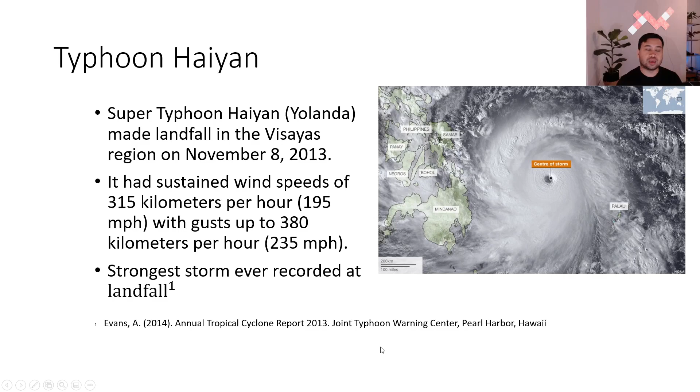Gusts reached about 380 kilometers per hour, and it was the strongest storm recorded at landfall at that time.

In terms of damage, about 6,300 people died, 28,000 people were injured, and about 16 million people were affected. In terms of infrastructure damage, around 1.1 million homes were destroyed or damaged.

The economic impact was about 12.9 billion US dollars. These are pictures from the city of Tacloban, which reported about 90% infrastructure destruction.

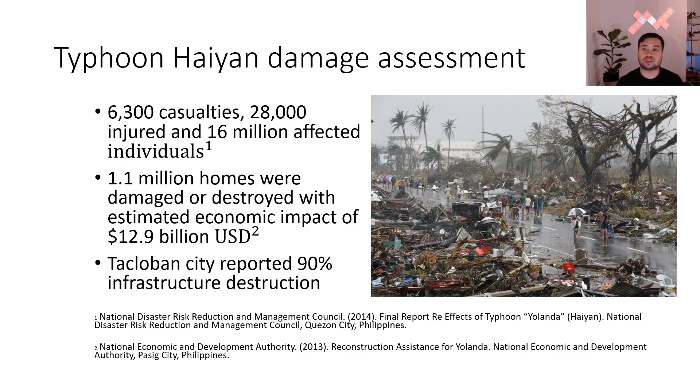This is the path of the typhoon, coming from the Pacific Ocean. It passed through the Leyte Gulf and made several landfalls in Tacloban, Palo, Tanauan, Tolosa, and Guiuan.

It made its first landfall in Guiuan and went westward towards Leyte province. Tacloban is the most populous city in that province, which is why it had a lot of casualties and damage.

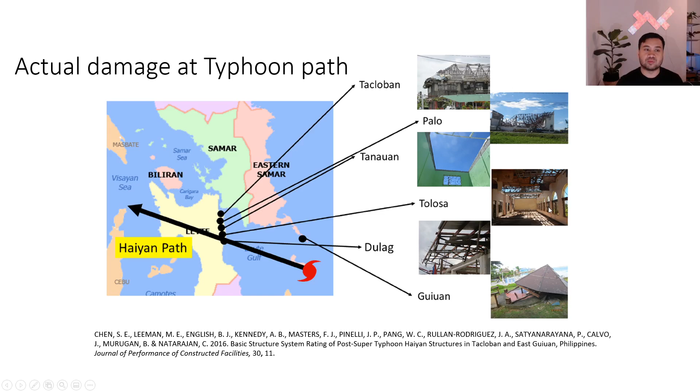As you can see, the damage incurred along the path of the typhoon was mostly to the roofs, which were gone. Here's a sample of that.

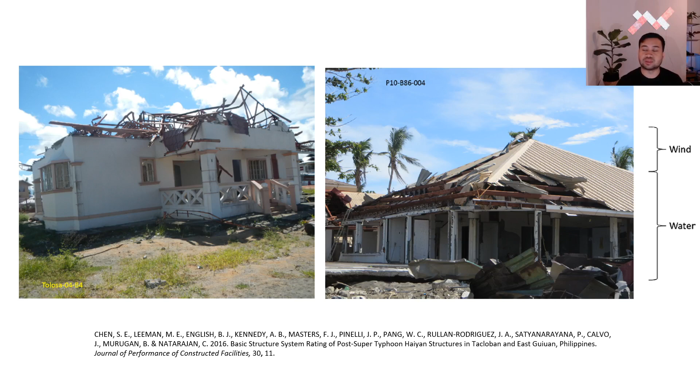Because of the strength of the winds, the damage occurred mostly in the roofs. Most of the people who died in the storm drowned because of the storm surge, but most of the infrastructure damage was caused by strong winds.

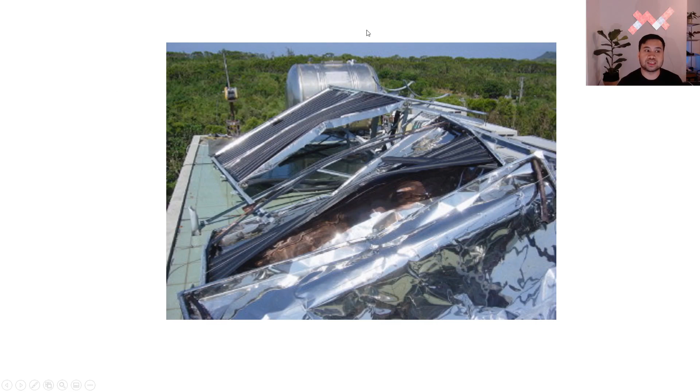At the same time, if you have renewable energy systems mounted on the roof, they will most likely be destroyed as well, as in this case. So in the Philippines, solar PV panels are installed on roofs.

Mostly they are installed by the upper middle income class or upper classes, and can be installed in different configurations depending on how much energy they need.

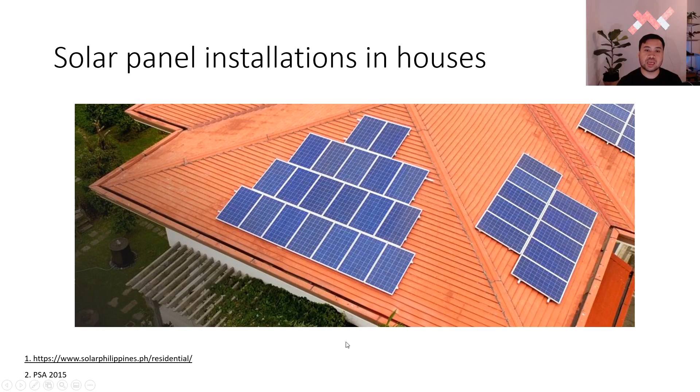We have 23 million households in the Philippines, and only around 218,000 households have solar panels installed as their source of energy.

So the point is, since a lot of storms pass through the Philippines, these renewable energy systems, such as solar PV panels, need to be protected from these typhoons, and they have to be structurally resilient as well.

The problem is that the building codes are not really clear about where to put the panels in order for them to be protected from natural elements.

So what we can do is estimate the damage the panels will have, or position them properly using a combined framework of structural resilience and energy assessment.

In the structural resilience analysis, we combine computational fluid dynamics and finite element analysis, which results in fluid structure interaction.

This can predict how much damage will occur in the panels when a certain storm passes through the roof.

At the same time, we wanted to check whether the panels installed on those roofs may be able to power the household and its occupants using BES, or building energy simulation. The data coming from the FSI will be performed independently, and then we can perform the BES also independently, and combine those results in order for us to say what is the proper panel configuration and roofing.

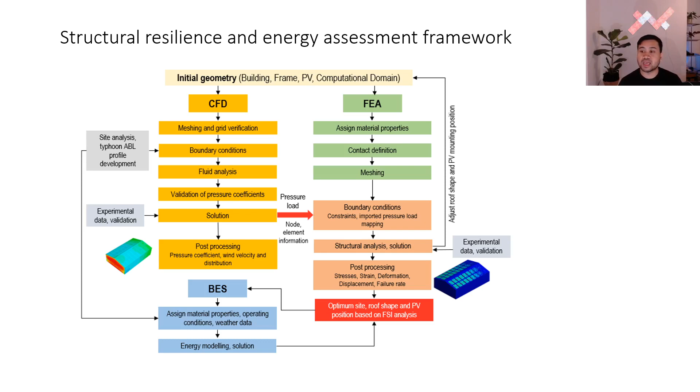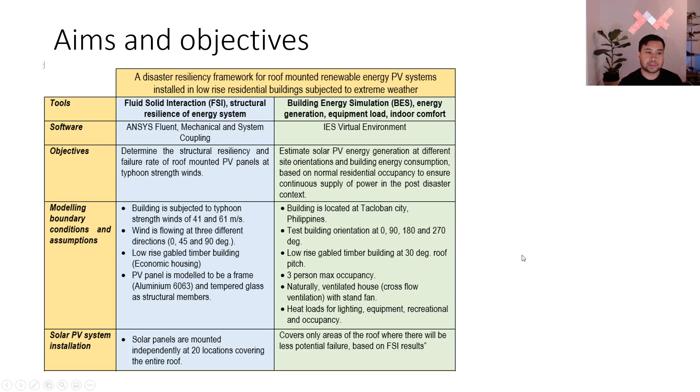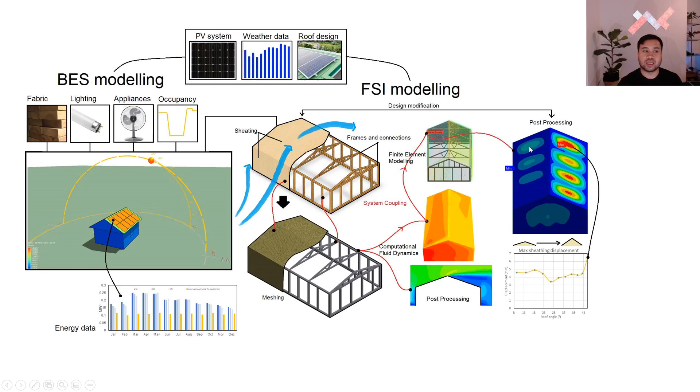So this is a graphical abstract we're going to do. We're going to do FSI modeling. Of course, we have one base building which has the PV system, the weather data, and roof design, and this will be shared across BES and FSI modeling. So this will be our building, which is just a small building.

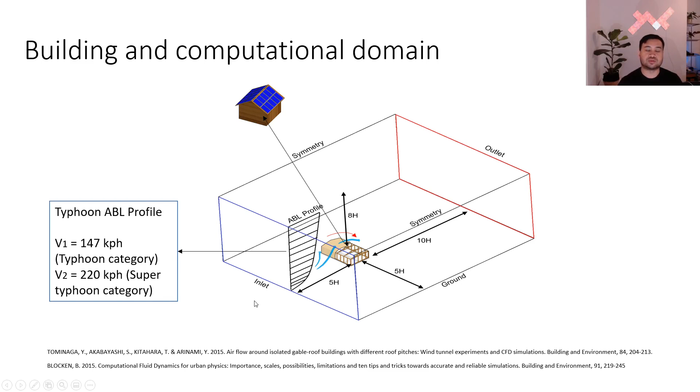So we're going to subject it to 2 wind speeds, 41 and 61 meters per second. 41 meters per second is 147 kilometers per hour, and the higher wind speed, 61 meters per second, is 220 kilometers per hour, which is a super typhoon category. We're also testing 3 different wind directions, wind flowing from this side, at 45 and 90 degrees.

The panels will be mounted on the roof, made from SunPower E19 solar panels. The building size is 25 square meters. The reason why we chose this is that in rural communities, the houses are very small, and for low income economic housing, typically the floor area is just 20 to 25 square meters. We wanted to target those low income communities, because if there's going to be rebuilding, we want to build houses that are resilient to future disasters.

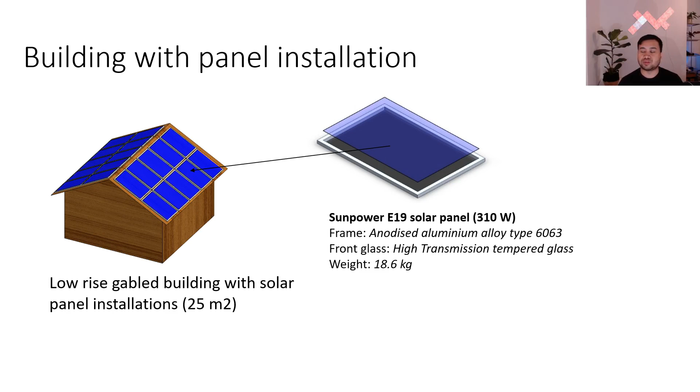So this is our base model at 30 degrees. We're going to test also a 26.5 roof pitch and a higher roof pitch of 37 degrees. We wanted to see what will be the effect of increasing the roof pitch on the performance of the solar panel in terms of generation, and at the same time in terms of structural resiliency.

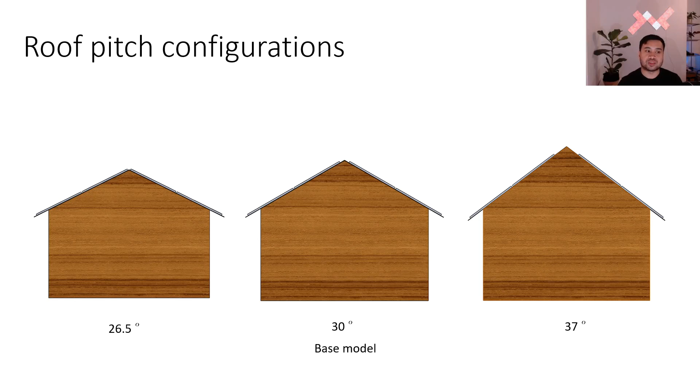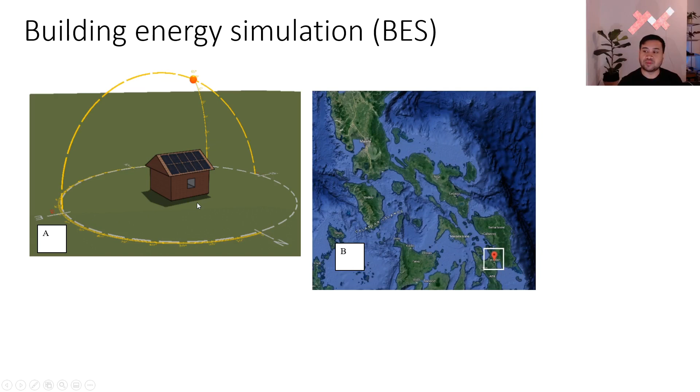In the BES setup, we're going to put this in the city of Tacloban. All of the weather data and solar energy data will be based on the city of Tacloban. This will be the building, and then we can change the orientation of the building to determine the proper site orientation: 0, 90, 180, and 270 degrees.

For internal loading, we're going to put 3 persons inside, 2 windows on opposite sides, 1 stand fan for space cooling, 2 CFL lamps, and 1 television for recreational use.

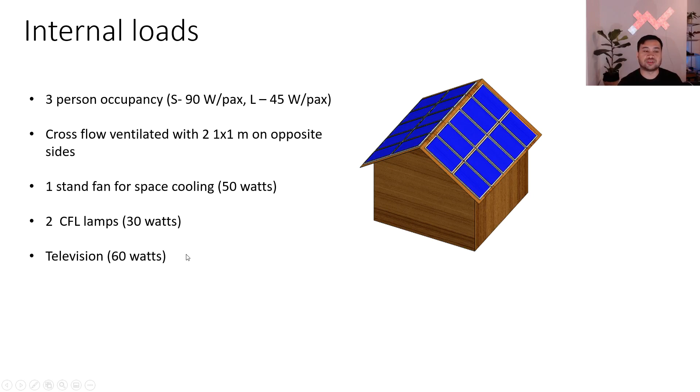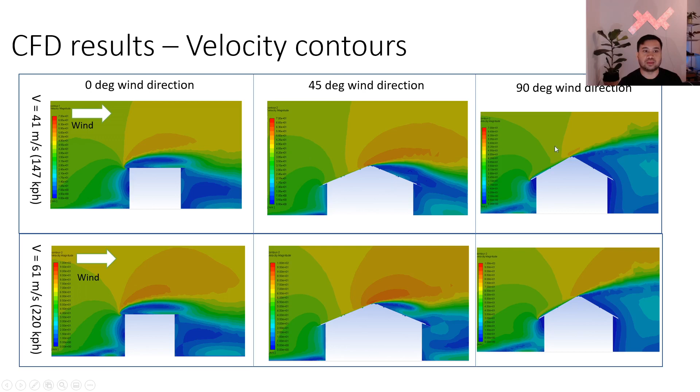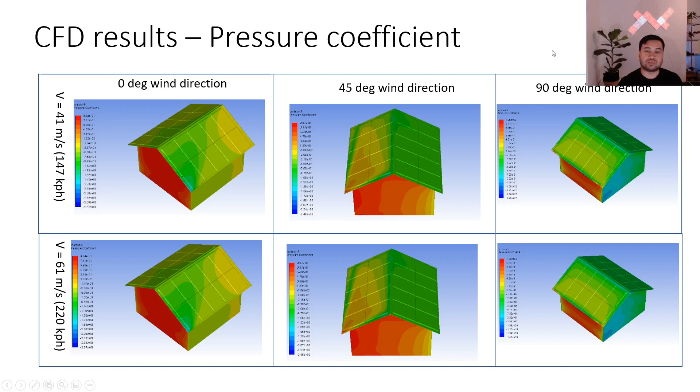So this will be the results for the CFD. We will test the wind at 41 and 61 meters per second, and at different wind directions. These are the surface pressure coefficients of the different rooftops and buildings. As you can see, the surface pressure coefficient changes depending on the direction of the wind, and that will be transferred to the finite element analysis to complete our FSI. So what will be the result of that?

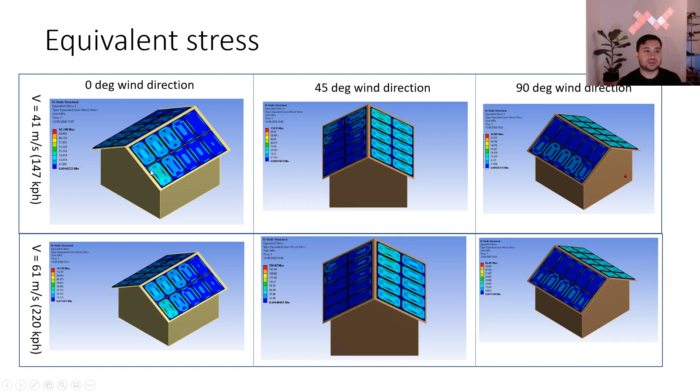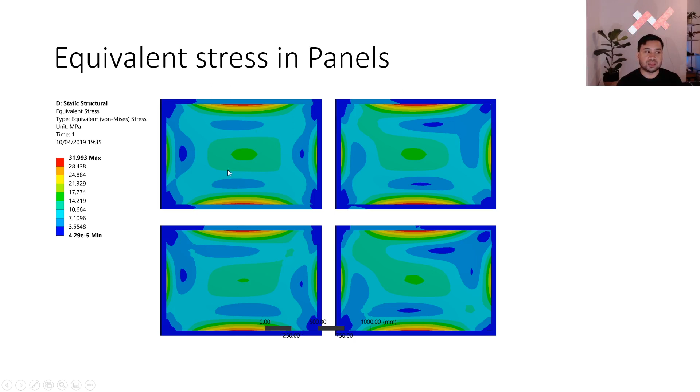So what would be the implication of that? As you can see, the panels will fail along the edges because this would be the highest equivalent stress, so it would be pulled up in that direction. So the worst case scenario for the angle will be around 45 degrees.

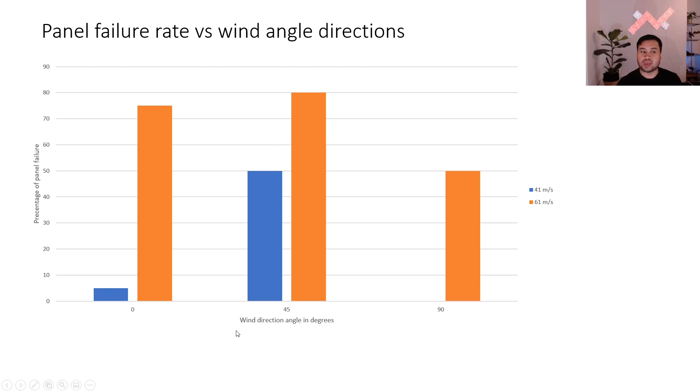So in this scenario, most of the panels will fail if the wind is blowing at 45 degrees in an oblique angle. So in this scenario, at 41 meters per second, all panels on the leeward side will fail. But if you put the panels on this area, they will not fail.

However, if you increase the wind speed to 61 meters per second, most of the panels in any location at 26.5 and 30 degrees will fail. So this will be the only panels that will survive if you install them in these areas. For 37 degrees, most of the panels on the windward side will still be able to function.

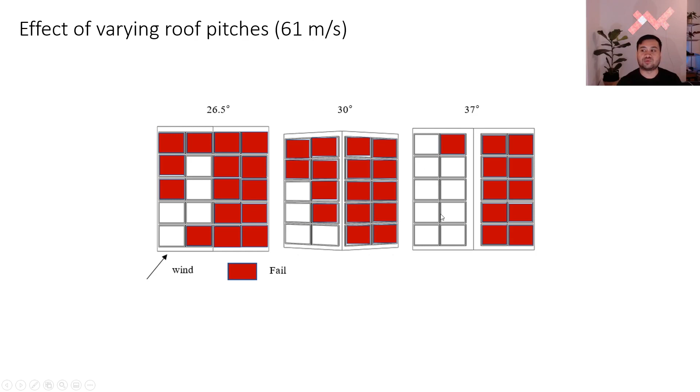For BES, we tested the energy generation at different site orientations. And as you can see, at different site orientations, if you situate your building at 180 degrees, you will get the highest energy potential.

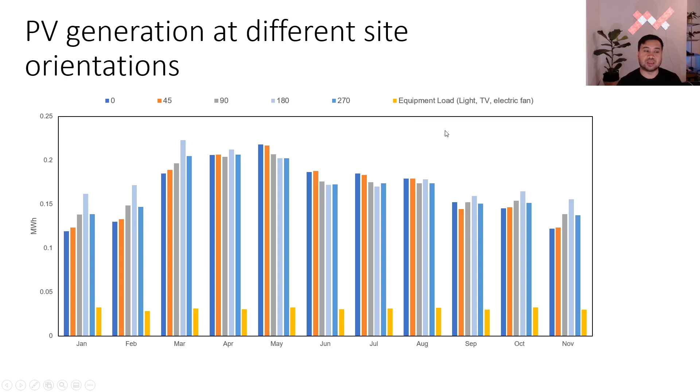As you can see, the months of March, April, and May are the highest because these are the summer months in the Philippines. But in any month, the solar panels will be able to sustain the equipment, the occupancy loads, the energy demand of the building at any site, at any month.

In terms of altering the roof pitch, the lowest roof pitch of 26.5 will have the highest generation at any site orientation. The lowest will be the highest, which is 37.

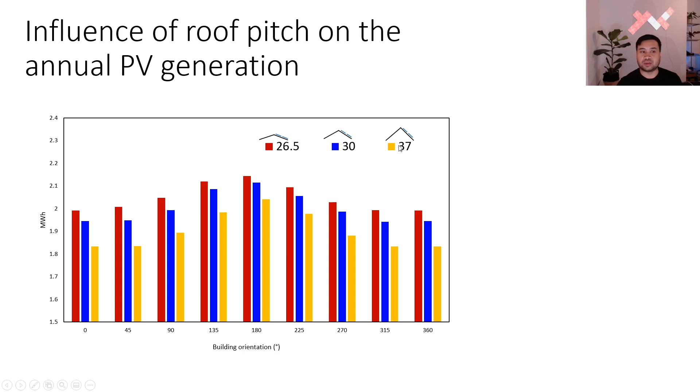If you're going to combine the results with the FSI, meaning in terms of how many panels will fail, as you can see, even at a lower speed, at the worst case scenario if the wind is blowing, it will be able to sustain even the wind, the energy loads of the building.

However, if you increase the wind speed to 61 meters per second, 220 kilometers per hour, the panels will not be able to sustain the building energy loads now, except for 37 degrees, which can still sustain it.

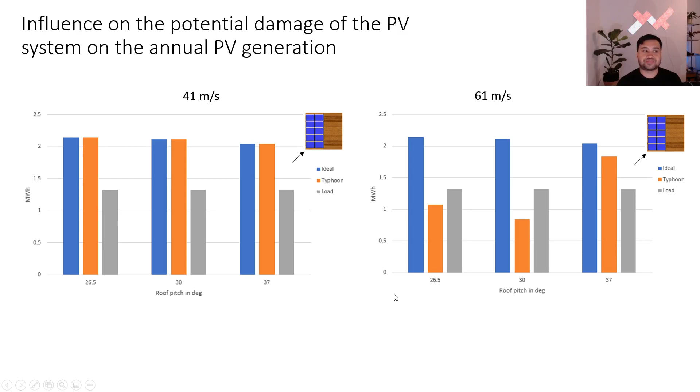So the conclusion is that we developed a coupled FSI and BES model to study the performance of low-rise residential buildings with roof-mounted solar panels under typhoon wind conditions.

In the PV system, the worst-case scenario of 45 degrees can power the household in the aftermath of the typhoon at a wind speed of 147 kilometers per hour. If it is increased to 200 or 220 kilometers per hour, most of the panels will be destroyed, and most likely the system will not be able to power the building and its occupants.

And based on where to put the panels, it's recommended that you install them on the windward side of the roof, if you know the direction of the wind in this case. So in this case, it's a case study. We can say that we can predict where to situate the building if we know the wind direction of the typhoon.

And in future disasters, we can future-proof our homes so that they are able to withstand the wind of the typhoon, and at the same time be able to sustain the household even in the event of a power failure.